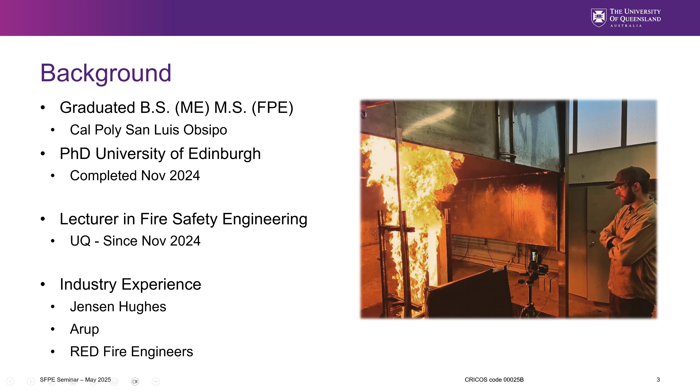So the goal of today's presentation, if we can summarize it and hit the punchline right away, is really to discuss fire growth rates in the context of a design fire analysis and to link those growth rates to fundamental physical drivers. I'm going to use the terms physical drivers and fundamental phenomena throughout this presentation. An example of what I mean is understanding how we contextualize things like growth rates in the context of flame spread. Flame spread is a very specific fire phenomenon, and we can use that to provide some context behind things like fire growth rates and heat release rates. So that's the objective of today's presentation.

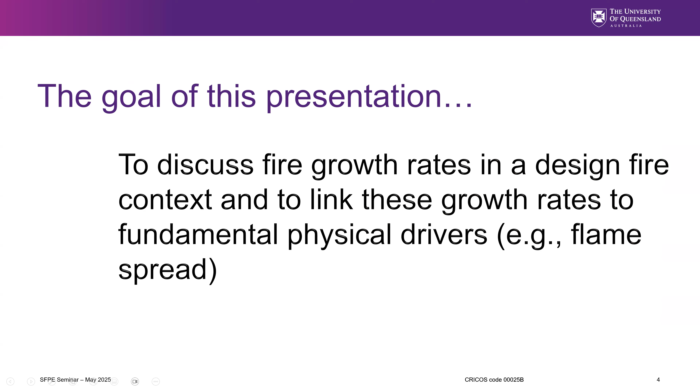To briefly rattle through a presentation outline, we're going to start with a little bit of background. We're going to look at what fire growth is, and how we characterize things like fire size. It's typically a discussion of things like using heat release rate curves, what an alpha T squared growth curve is, those kinds of things that I think a lot of engineers will be familiar with.

I'll briefly discuss some fundamentals on flame spread. This is not a dedicated flame spread lecture. I would love to give a two hour dedicated lecture to these kinds of things, but we'll keep this within the context of fire growth.

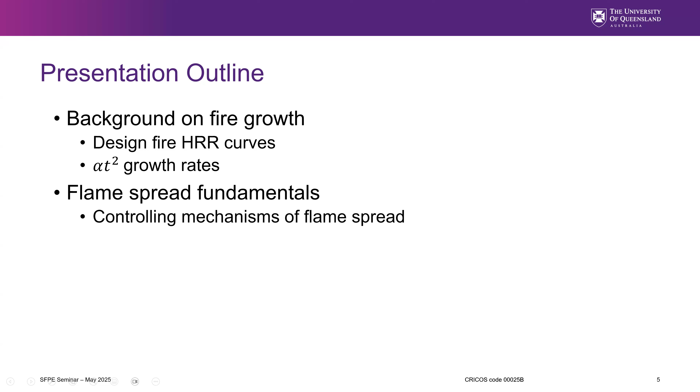And then lastly, we'll look at things like heat release rates for complex fuel packages. How do we actually characterize things like fire growth? And then we'll touch very briefly on how growth rates and the framework that we have for fire growth change as we look at emerging hazards and new things that we're seeing in fire safety engineering.

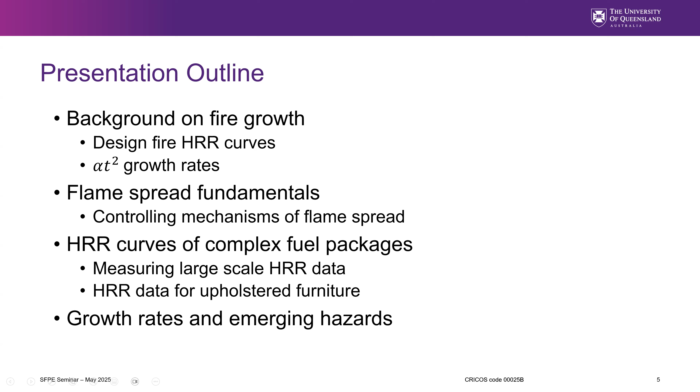So just to kick things off, in a range of fire scenarios, the hazard of a given fire is largely linked to this process of fire growth. It's this idea of transience, that a fire will grow, that makes fire so particularly hazardous, particularly in the context of considering occupant safety. All of these things require a transient analysis of fire growth.

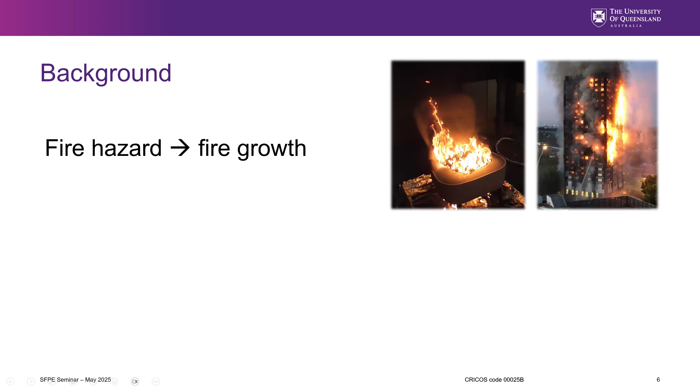So this concept applies to fuels that you might see in a typical building fire, things like upholstered chairs, so our typical fuel loads. This also relates to exterior fires on cladding systems on the exterior envelope of a building. But this concept also applies when looking at fire growth in a bushland environment, and things like the wildland urban interface. The hazard of a fire will evolve as that fire grows.

Now, this rate of growth is often linked to the concept of flame spread. Flame spread is not the only thing that drives fire growth, but if you think of the idea that fire will grow to consume fuel nearby, then the mechanism by which a fire spreads to other fuel is an intrinsic part of fire growth. So that's one that we're going to focus on in particular detail today.

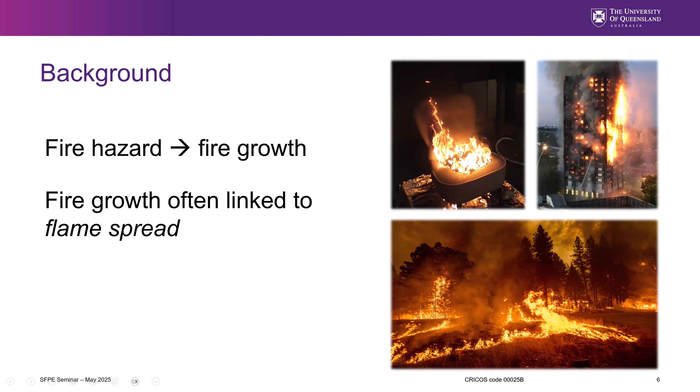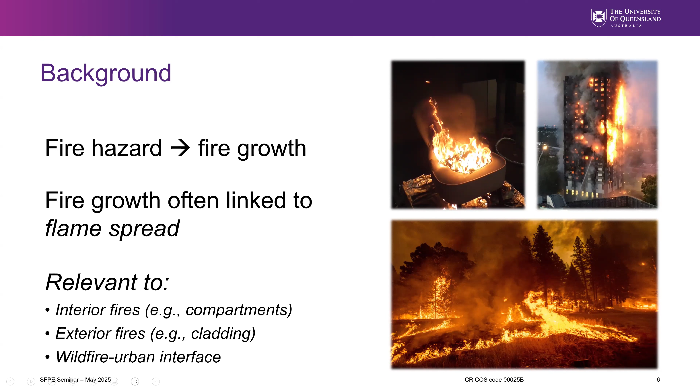Now, this idea of flame spread being linked to fire growth, and fire growth being linked to fire hazard, can be relevant to all sorts of conditions. This could be relevant for compartment fires, for exterior building fires, and for things like bushland fires. However, we're primarily going to focus our presentation today on compartment fires, the typical kind of fuel loads that we'll be looking at as fire safety engineers. Not to say that these principles can't be applied elsewhere, though.

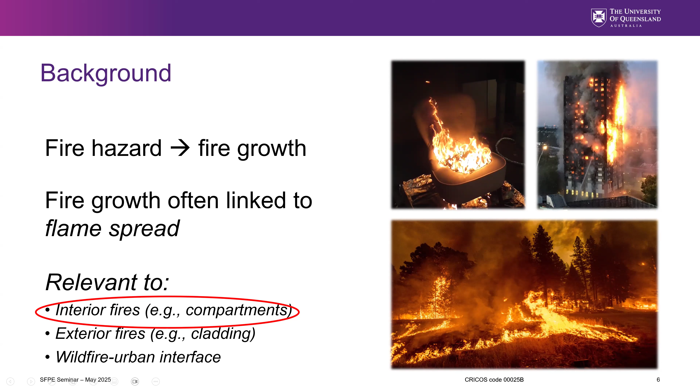Now let's take a look at the framework of our design fire analysis. When we're doing something that requires us to assume a design fire, at the heart of that process lies our assumption of a heat release rate. There are different ways we can define a design fire. You can use temperature time curves for structural calculations. You can use all sorts of other assumptions. But really, when we're trying to characterize fire behavior, the heat release rate is our best metric for fire size. So that will become an intrinsic implication in so many bits of analysis that we might do.

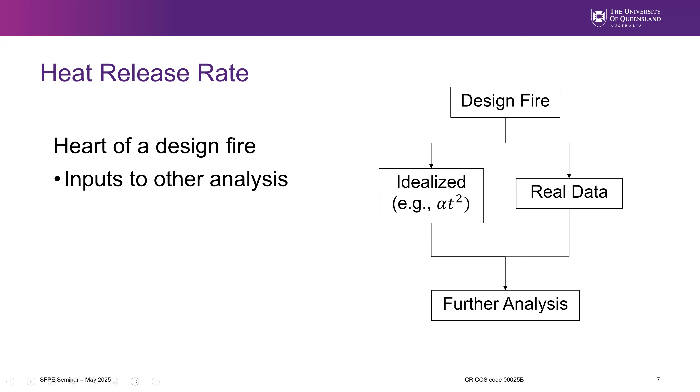And you see that by looking at all the kinds of analysis we might do in fire dynamics. But in order to choose a design fire heat release rate, you have two coarse choices. One, you can choose an idealized configuration, such as an alpha T squared fire. Or you can choose something from real data.

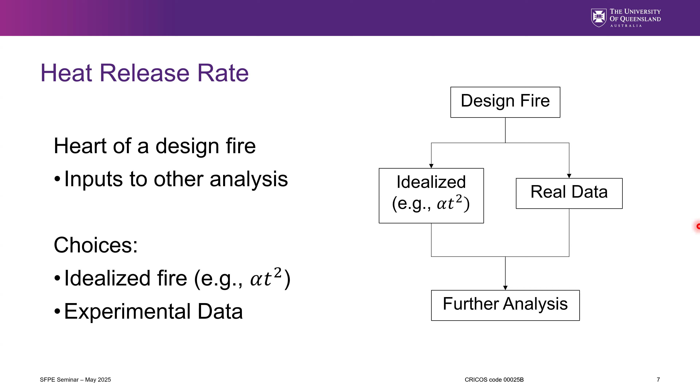You can run an experiment. You can actually conduct an experiment on a fuel package and look at the heat release rate of that particular fuel package. But regardless of the choice that you make, that heat release rate will be essential in conducting additional analysis. And again, I keep saying that heat release rate shows up in lots of different ways. If you take any calculation you might find in a textbook or the SFPE handbook, whether it's ceiling jet correlations, for things like a sprinkler calculation or just understanding the temperature distributions along a ceiling, whether you're looking at entrainment rates for something like two-zone modeling, or whether you're looking at the critical flashover threshold, all of that will link to the heat release rate.

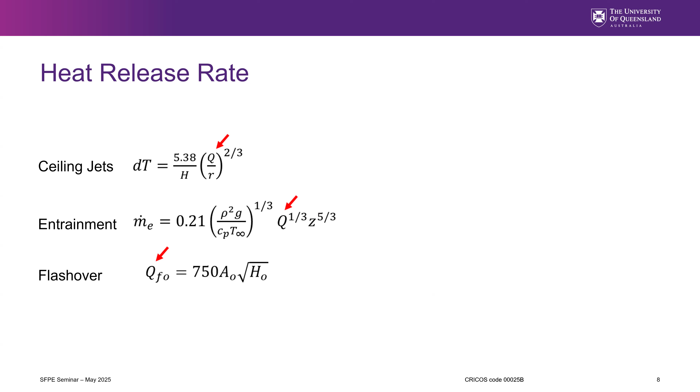And another essential sort of analysis to consider is if we're going to do anything with CFD, if we're going to be running an FDS simulation, we need to be able to prescribe a heat release rate.

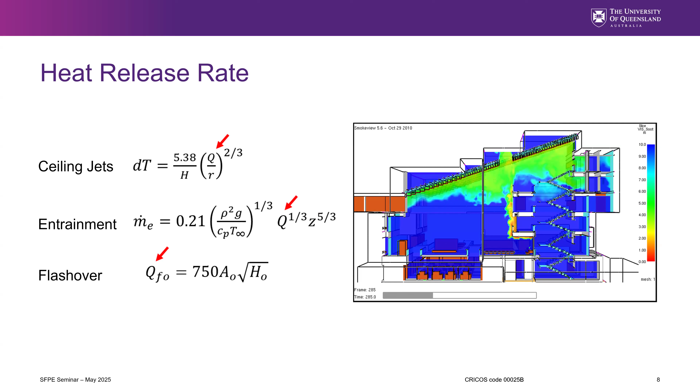So I think it's very clear, though, that this heat release rate really is at the heart of these kinds of analyses, right? So the definition of our heat release rate, and for a lot of analysis, the definition of how we define that growth rate becomes extremely significant in this analysis that we're running. So I said there's sort of two choices, right?

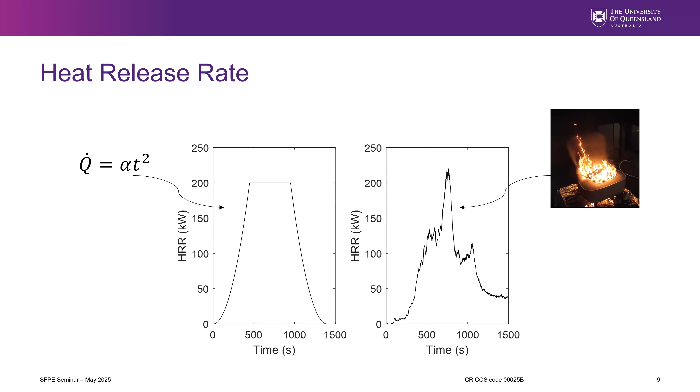This is an upholstered chair that I burned under a calorimetry hood over at the University of Edinburgh, and this is the actual heat release rate output that you'll get. So if you ignite that fuel package and you let the fire grow, you can actually measure that transient fire size, right? With all the peaks and troughs and all the transients to it. But that's a very specific case, right? That's the heat release rate that occurred for that experiment, compared to something that could be a little more generally applied, such as an alpha t squared growth rate.

But in either case, how do we define this sort of growth rate? Can we characterize this, and how do we use the information of that growth to a peak heat release rate? How can we use that information as an engineer, right? In what ways can we actually incorporate that into analysis? And that's really the heart of what we're trying to get at today.

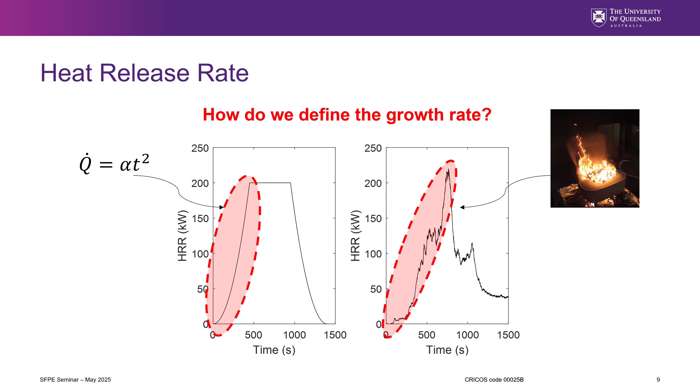So again, I've been throwing around this terminology of alpha t squared fires, and I assume that many fire engineers are familiar with that term, with what that actually means. But I want to go into a little bit of the context and the historical setup of the alpha t squared framework. So basically, the alpha t squared heat release rate curve assumes that our fire will grow with a t squared, or time squared, dependency, and then we can calibrate that using a different alpha coefficient. From things like the SFPE handbook and other resources, you'll be able to find tabulated growth rates for what we'll call a slow, medium, fast, and ultra fast fire curve.

Now, these are all coarse approximations, but really what they're approximating are categories where they took effectively how long it takes for that fire to reach about 1 megawatt. It was actually, I think, 1055 kilowatts in the original literature because it was a conversion from BTUs. But it's about a megawatt. And in this case, a slow fire would take 600 seconds, and an ultra fast fire would only take 75 seconds to hit that approximately 1 megawatt threshold. So that's the idea behind this framework. But where did this actually come from? And so

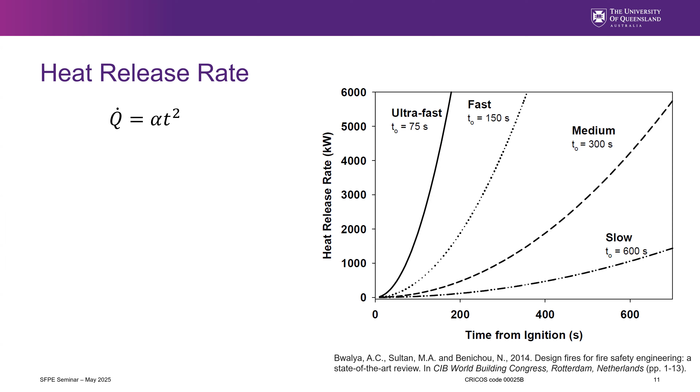there's quite a range of codes and standards internationally that you can look at to provide some basis for this alpha t squared relationship, particularly in a design context. Just picking an example, I'm going to reference NFPA 72. This one actually has quite a bit of information behind the process of developing an alpha t squared fire. And it's an interesting reference to take a look at and read through some of the commentary.

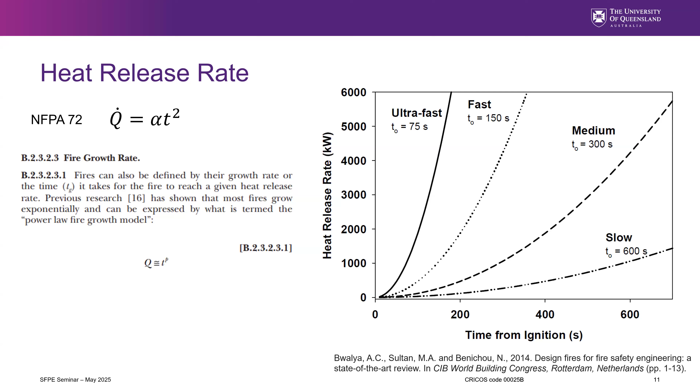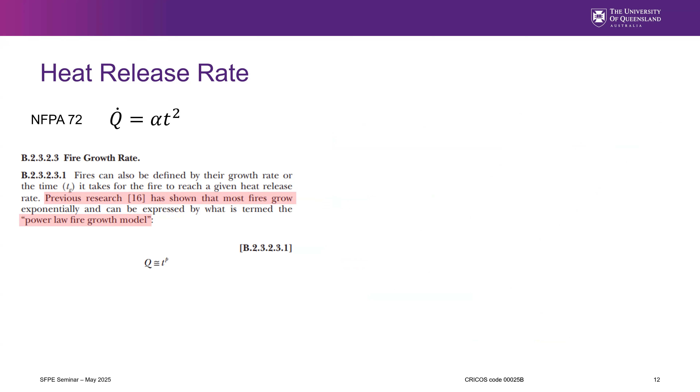But what's interesting too is if we start with this definition from NFPA 72, we'll say that if we're developing a heat release rate for fires, research has shown that most fires will grow with a power law dependency, right? It's an interesting starting point. So we're saying that fires generally grow as a power law. If you look at a fuel package in a room, it probably won't grow linearly, but it'll grow with some sort of power dependency. Now, in the context of most design standards, the simplifying assumption becomes that we can take experimental data, take a bit of a leap, and reduce that power law dependency to a t squared relationship.

The data that's provided in something like NFPA 72 shows that there's a lot of examples where, when you burn a fuel package, that heat release rate will grow with something like a t squared dependency, right? So that becomes a nice simplifying assumption. So long as we can calibrate that alpha value, we can actually develop a generic design fire growth rate. And that's sort of the philosophy behind this, right? But it all stems from this idea that there's a power law dependency for most fire scenarios.

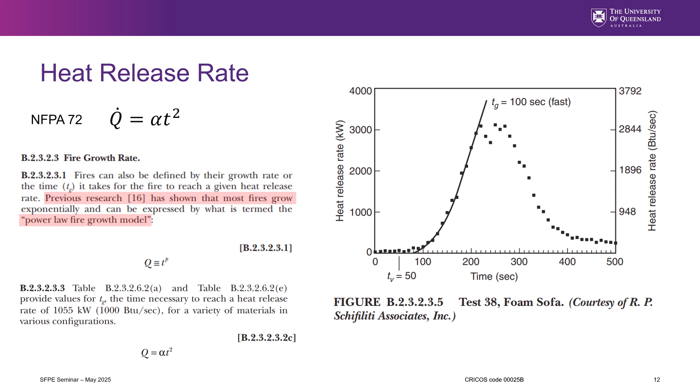And we're assuming that the fuel packages that we're interested in are going to grow with a t squared dependency, right? And that's kind of where it stops. And then also NFPA 72, for example, goes on to provide tables and tables of information on different fuels. So if you choose, let's say, wood pallets stacked 1.52 meters high, right? You can then back out what would be the alpha classification for that fuel package, right? If I'm looking at other things, let's say, I don't know, what's another one? Polyurethane mattresses, you can actually back out an alpha value for those, right?

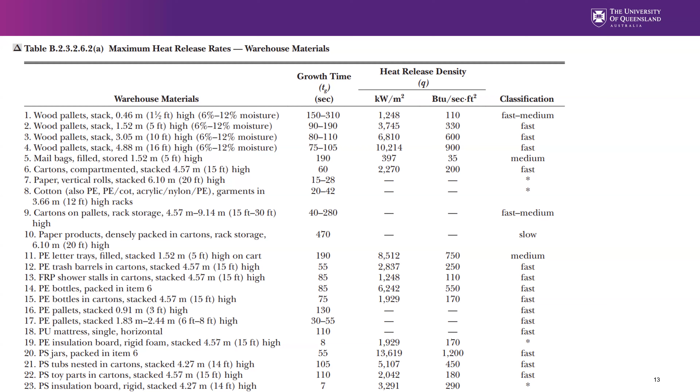And so from this information, in theory, an engineer can take our fuel load and develop an approximate growth rate, right? That's kind of the philosophy behind providing this information. And there are tables like this not just in NFPA 72, but in various resources in the fire safety literature. But it's an interesting question, though, that I'll pose, right? Is this enough information to really define our growth rates for design conditions, right?

As an engineer, for all scenarios that we might design for, is simply prescribing the fuel load enough, right? There is a lot of value in understanding the range which these fuel loads give us, but are we capturing the whole picture? Is there something else we should be thinking about? Or at least, what's the limitation of this table? At what point do we need to consider some additional information, right? Because really, the choice in our growth rate makes a huge difference in the analysis that we might run.

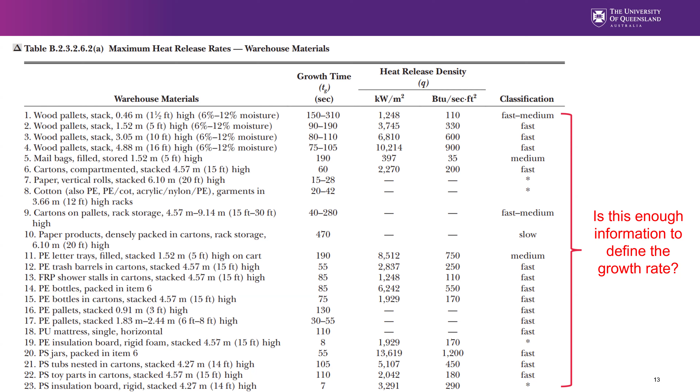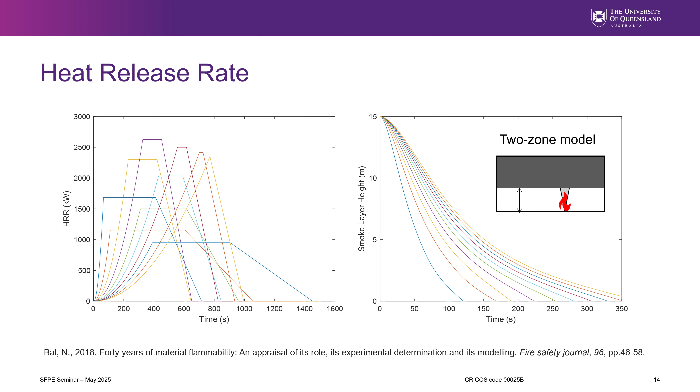So whenever we're doing analysis, particularly for life safety, whether it's looking at tenability or analysis looking at, say, alarm detection and suppression calculations, right? These growth rates are incredibly important, right? So while we have these broad categories of understanding fast versus medium fire growths, right? Changing those things slightly makes a huge difference in our analysis, right? So how do we gain more confidence in what growth rates we might choose, right? How do we actually build more confidence in being able to adapt this to the scenarios that we're looking at, right? And that's really what we want to dig into a little more detail.

So let's take one big step back, right? We've been talking about alpha T squared fires, and so far the basis that we understand is that in NFPA 72, there's a lot of data that's presented that shows that it's a decent fit to a T squared type dependency, okay? But can we provide a better physical basis, particularly for a time squared dependency, right? Because fires grow in all sorts of funny ways, right? So what's up with this T squared time dependency in particular?

Actually, if you go back, there's some really interesting, particularly post-World War II literature, where in the early days of developing design fires, there was a lot of fire testing done on horizontal surfaces, looking at a physical basis for a T squared dependency, right? There's a lot of really interesting literature out there, particularly in a flame spread context. But basically what you do, from a physical perspective, is take all of those parameters and lump them into one alpha term. So by assuming an alpha T squared fire, I'm assuming, for example, one base case that has a physical basis is a radially growing fire.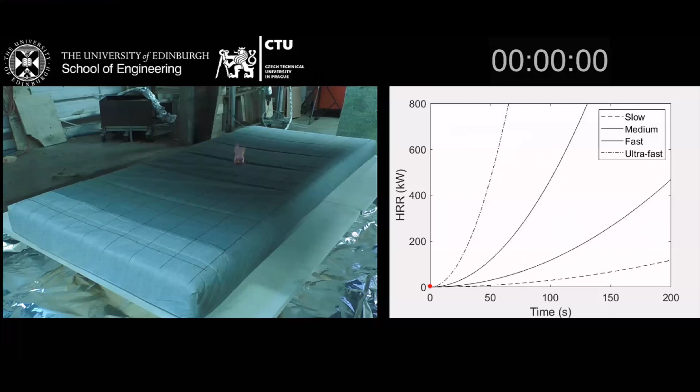What's really interesting too is if I go back and play it again, take a look at what happens to the heat release rate curve up to the point where the flames reach the edge of the mattress. So the sides, there's one dimension that's shorter. It's following the t-squared dependency. Then the second it hits the edge of the mattress, it starts to deviate from that t-squared dependency because you no longer have a radially growing fire, right?

So the physical basis for a t-squared dependency for this fuel package is a very good assumption. It's kind of an ideal scenario for something like a fast alpha t squared fire. It fits perfectly, right? So that is a great example of a fire scenario in which we can use something like our alpha t squared growth rates to reliably predict the growth rate of a fire.

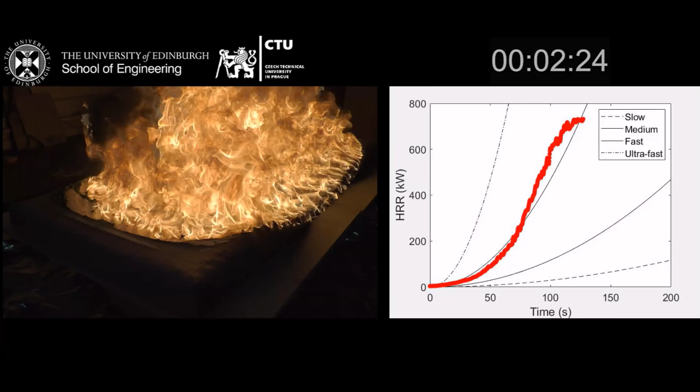But in order to understand how this starts changing with complexity, it's worth taking a step into the world of flame spread, right? So we know that the rate of flame spread is affecting our fire growth rate for a fuel package like that, right? So what is flame spread, right? Now, the concept of flame spread was the topic of my PhD, so this is something that is near and dear to my heart, and I could ramble on about it for hours. The students in the room here have probably heard me ramble on about it for hours. But for the sake of this conversation, I'm going to keep it fairly limited to understanding how we link this to fire growth, right?

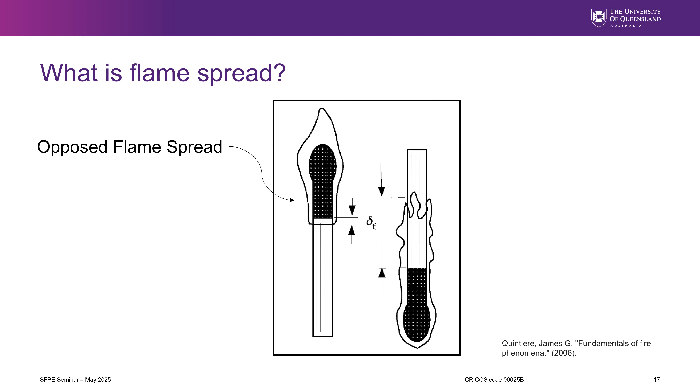So we're going to largely split flame spread into two categories. We're going to look at things as either an opposed flow flame spread problem, right? Imagine striking a match and watching it slowly creep down the matchstick. The flame is moving in the opposite direction of the airflow being entrained upward due to buoyancy. And concurrent flame spread, meaning that the flame is moving in the direction of induced buoyancy, like you strike a match and hold it upside down, right? That kind of effect.

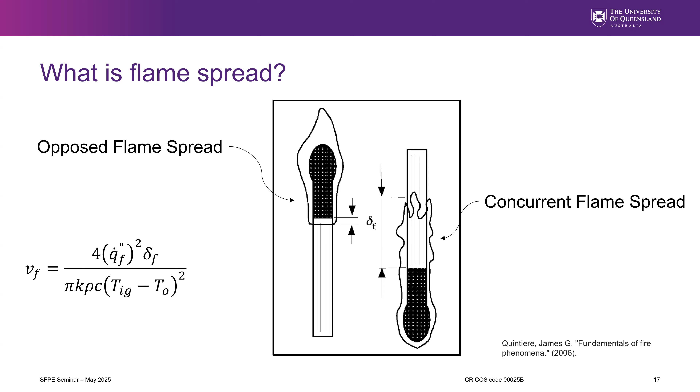If I add more energy from the flame, my flame spread rate goes up. If it takes more energy to actually raise my fuel to the pyrolysis temperature, my flame spread rate goes down, right? And there's quite a bit of complexity beyond that, but for the sake of most engineering problems, we can reduce the problem to that simple equation, right? So on the simplest level, let's look at it as just an energy balance.

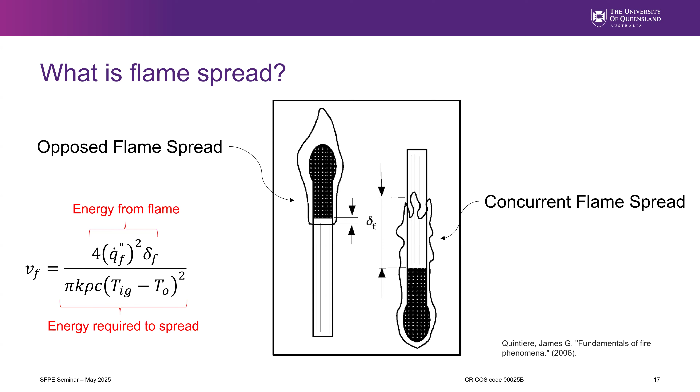One thing to note, though, is if we're looking at things like upward or downward flame spread, opposed or concurrent flame spread, there is a little more complexity there, right? And I would recommend for anyone who's interested in reading further, there's a great reference here by Fernandez-Pello and Hirano that is a great review of what we'll call the controlling mechanisms. Like, what are the processes that actually control the flame spread process, right? And if you start looking into more complex things, we have to incorporate things like the kinetic rate, the reaction rate of a flame will influence flame spread, right? So in putting all of those complexities aside, we're reducing the problem, for the sake of an engineering analysis, to the amount of heat transfer we can provide to the fuel, right?

But what's interesting to note in comparing opposed flow and concurrent flame spread is for the opposed flow case, right? Let's imagine that matchstick example. If you're talking about how much energy the flame can transfer to the fuel, there's a very small area over which that can happen, right at that leading edge of that match flame. There's a very small area over which that heat transfer is acting, right? When you're looking at concurrent flame spread, there's a much longer distance over which that flame can heat the solid, right? Resulting in very different rates of flame spread.

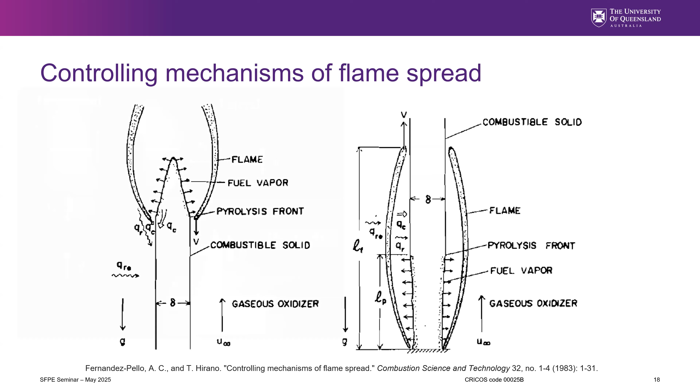The point being that you'll often see upward flame spread, concurrent flame spread, will be much faster than opposed flow flame spread, right? For all things being equal, just try lighting a match at home and you can demonstrate that yourself, right? But the point of that being that even within the world of opposed flow flame spread, if I start changing my geometries, rates of flame spread will change, right? So these are some examples from my PhD where I took PMMA, a very common polymer in fire safety science, and we did flame spread experiments in different orientations.

So if you look at downward flame spread in a wall configuration, lateral flame spread, again in a wall configuration, and horizontal flame spread, which is more akin to what we saw with the mattress, for example, right? Each of these configurations are opposed flow flame spread configurations, right? Your flame is moving in the opposite direction of entrained air at the flame front, but the actual geometry of the flame is changing in each one of these cases, right? And as you can see from the results there, the flame spread rate changes as a function of this geometry.

And so because of that, it's important to know that if things like our flame spread rate play a role in our fire growth, then let's say I know the flame spread rate in one configuration, or I know my alpha value in one configuration. When I change my configuration, everything else changes because the heat transfer ahead of the flame front is going to alter your flame spread rate, right? So that's an important thing to keep in mind when we're looking at applying things like flame spread to practical engineering scenarios.

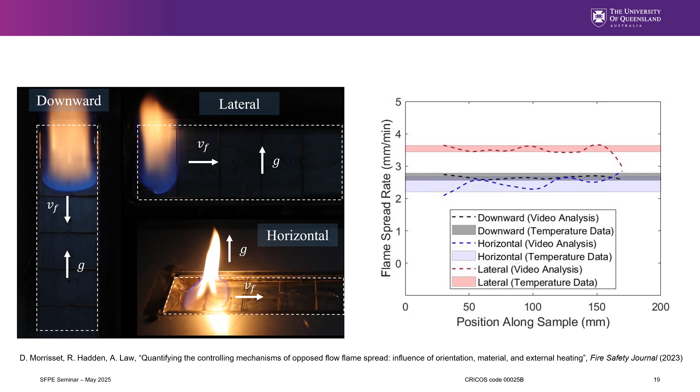So let's go back to that idea of the alpha t squared fire. Let's go back to that mattress example, right? So let's assume we have a horizontally spreading fire, right? And the flame spread rate is more or less constant. That's something that we saw for opposed flow flame spread. You can actually get constant, steady flame spread behavior. That makes sense. So this idea of a t squared dependency starts to check out, right? We walked through that derivation.

That seems good, right? But what happens if I put this mattress in a compartment? Right, so what if I put this in an actual room and we allow a smoke layer to develop? So if you put it in a room and now you allow a smoke layer to develop, that smoke layer is going to add an additional heat flux to your fuel, right?

If we put this inside a compartment, it might not be the smoke layer, it could be a heated wall or an additional burning item, but there could be some sort of external exchange with your fuel. Now we assume that this alpha T squared relationship holds, but we know that embedded in that alpha is your flame spread rate term. And we also know from that very simple equation that we showed for flame spread that your flame spread rate is going to be linked to the external heat flux conditions on your surface.

So if you have interaction with your fuels, with whatever else is going on in that compartment, ultimately we're saying alpha, our growth rate, is intrinsically going to be related to the heat flux conditions acting at the fuel. Meaning that alpha might not be constant in time, particularly when we're looking at fuels in an actual compartment, right?

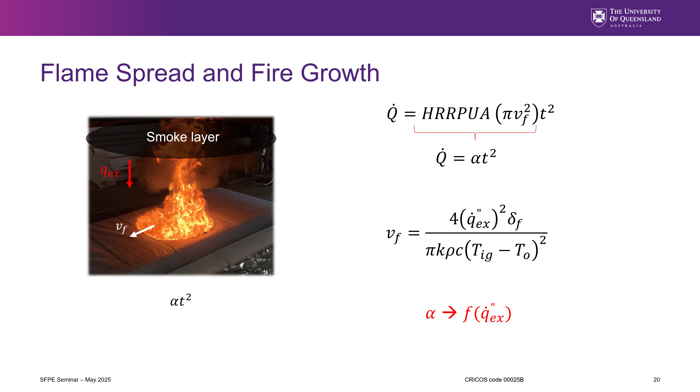So just at the simplest level, it's important to acknowledge that even if we have a case in which the alpha T squared model is valid and it works really well and we can get an idea of that growth rate, it is a big assumption to maintain that that growth rate will stay at that growth rate when it starts interacting with the compartment around it, right? Just something to consider for developing a design fire.

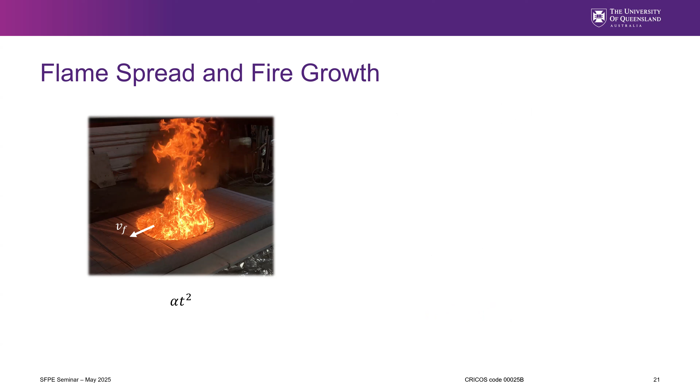But now let's move on from something like a compartment geometry, and let's just simply change the orientation and the mechanism of flame spread. So if we go from something like this horizontally growing fire to an upward flame spread problem, let's say you have a wall of, let's say, PMMA in this example, what does that flame spread process look like, right?

Now, this is an excellent paper from 1975 by Orloff and De Ris. So I would absolutely recommend people go and read that work if anyone is interested in looking at the problem of upward flame spread. But what this work was able to do was to develop a sort of fundamental relationship where how do you actually look at how does the flame spread rate change as a function of time for a very large piece of PMMA. This was a very large wall for upward flame spread.

And they were able to demonstrate that actually you can pretty reliably approximate the rate of flame spread not using something like a t-squared dependency, but using an exponential dependency, right? And so there's natural physical basis that when you start looking at the problem like upward flame spread, you can move to an exponential time dependency, right? And that's a better approximation in terms of the physical drivers, actually affecting that process of fire growth, right?

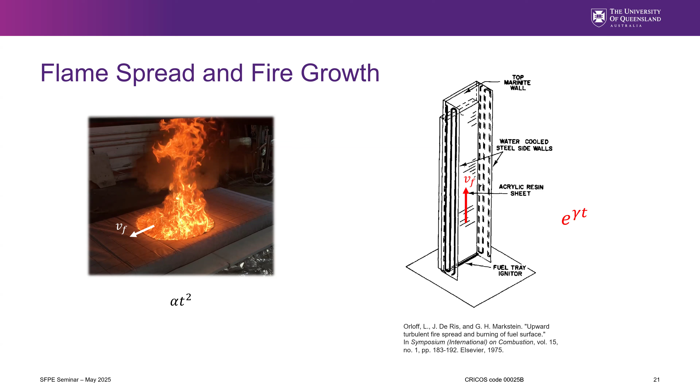So what can we take from that information? If you take something like a fire in a room, you start as a sort of radially growing fire. Let's say that fuel package starts in a room. It starts to consume additional fuel around it. That means in that stage, there's a very good physical basis for an alpha T squared fire.

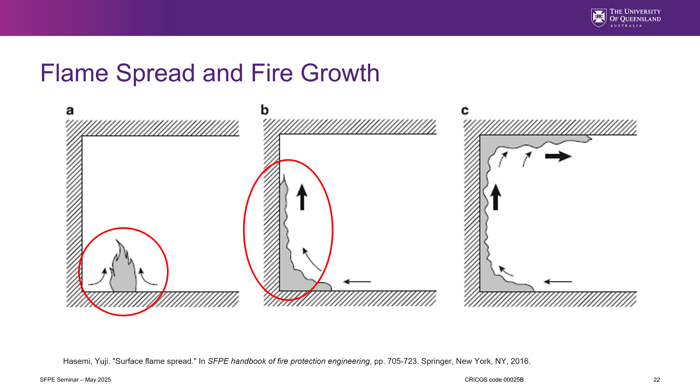But let's say that fire eventually attaches to a wall and starts experiencing upward flame spread, right? That's where the assumption of a t-squared dependency starts to become a bit difficult, right? Because actually, your time dependency is much more fundamentally linked to something like an exponential growth rate because of the upward flame spread phenomenon, right? So that just sort of gives an idea of over the course of a compartment fire, the drivers, the things that will actually affect that growth rate might change over the course of the fire, right? So we need to sort of account for that as fire safety engineers.

Now, all of that is the theoretical basis. All of that is about equations and effectively understanding where flame spread plays a role in this, right? But now let's talk about if we actually want to look at the growth rate of a real fuel package, how do we actually measure that, right?

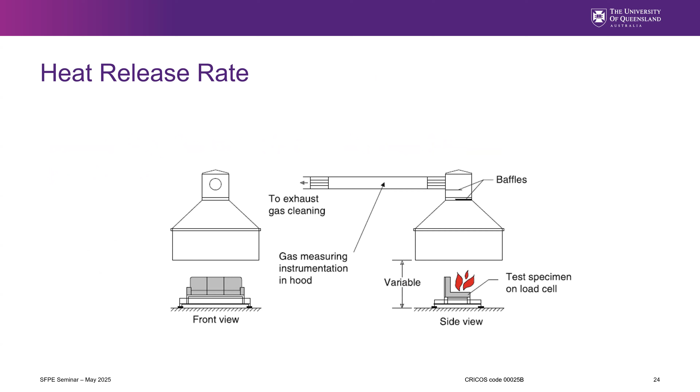And so many people are going to be familiar with this idea, but if you want to measure my transient heat release rate of a couch, you can take that couch, put it beneath a furniture calorimeter, light it up, and measure the heat release rate. By capturing all the combustion gases, you can back out as a function of time what is the size of my fire, right? Now, the beauty of this is we can take any fuel package we want and characterize the transient heat release rate behavior of that fuel package, right?

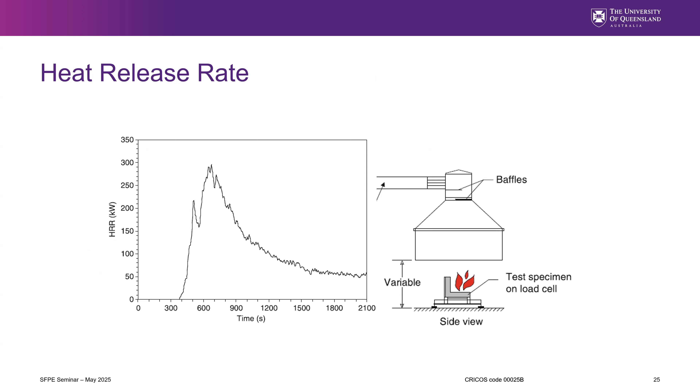So for any engineers who are interested in finding this kind of data, one database that I highly recommend is the NIST calorimetry database. The researchers at NIST have done an excellent job updating this database. There's lots of information on there, ranging from heat release rate to video of these experiments, very good uncertainty analysis and so on. It's an excellent database. Another resource to consider, if you want to look at heat release rate curves, is Babrauskas' chapter of the SFPE handbook. Lots of very good information in there as well.

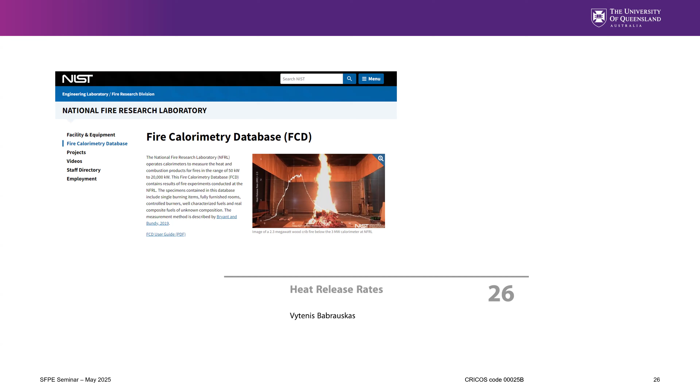And that gives you an idea. It's very easy to go out there and find information on heat release rate data, right? And I think there's a lot of value to that as a fire engineer. But when you're pulling out information, I do think it's really interesting to take a step back and consider a few things when we're looking at heat release rate data.

So it begs the question, right? If I'm trying to characterize the characteristic heat release rate of potato chips, can I assume that it's going to be a 6 megawatt fire within 100 seconds in all scenarios? Right? That's a pretty dramatic fire. It's a really extreme growth rate in particular. That'll be a very onerous design fire for a lot of scenarios.

So the question becomes instead, what was the makeup of this display, right? How was the display built? What were the materials that actually built the unit of that display? How are these fuel packages arranged within that display? Where was it ignited? Was it ignited at the bottom, so you got upward flame spread? Or was it ignited somewhere at the top or the side where you got something more like an opposed flow flame spread, right? All these things are going to completely change your design fire, and they will fundamentally change fire growth.

So it's important to look at these things and understand that this is the integrated effect of all of the physical phenomena that drive a fire, not just these potato chips, right? And I think that's a really important point to make. It's still extremely useful. If we had more information on this kiosk, you can actually understand, okay, this is maybe a worst case fire size we might expect from something like that. That's extremely valuable. But then again, taking things like the growth rate with the context that it's going to be extremely situationally dependent.

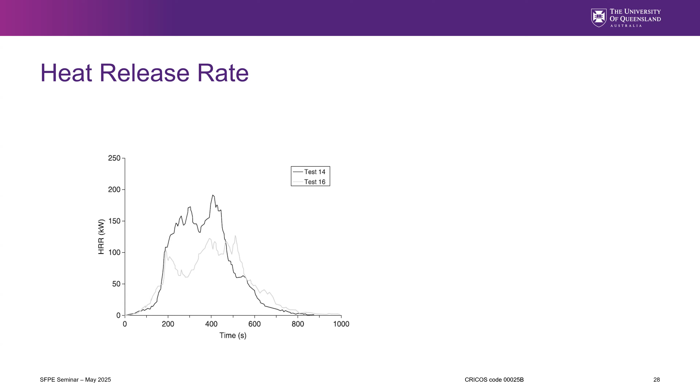But simply by running the same experiment again, now I'm finding the peak heat release rate somewhere around 200. Right? So understanding that when we're looking at complex fuel packages, there's a lot going on. We need to understand why was that different, right? What were the physical mechanisms that actually led to that heat release rate being higher? And so this became a bit of an interesting rabbit hole.

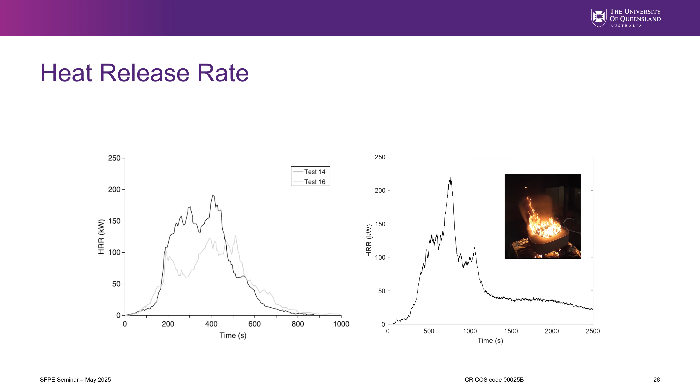So I was thinking, if I take a single upholstered chair, right, and I run an experiment on it, that's the heat release rate curve I get. So I took a chair, I ignited it with a Bunsen burner. That's the heat release rate curve I get. Is that characteristic of that fuel package? If I run the same experiment again and again and again and again, 10, 15, 20 times, what is that heat release rate curve going to look like? Right. And so that's what I did.

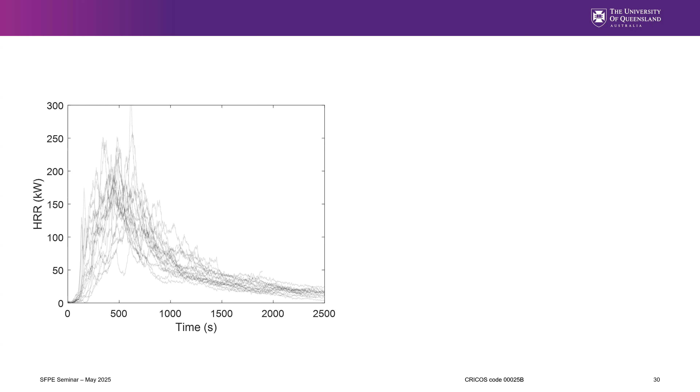And so this becomes something that, I say this not to labor a point, but we see this in the literature all the time. Experiments that are conducted on complex fuel packages like cars, electric vehicles, things like that, where we take those curves and we take an average in time. But that average in time no longer physically represents any individual experiment. So we're no longer actually characterizing the growth rate or the peak heat release rate of those fuel packages. So instead, it's really worth taking these curves and asking, can we identify the variability using a different metric than just time? So if we take each one of these experiments and we identify a bunch of key events throughout the experiment, okay?

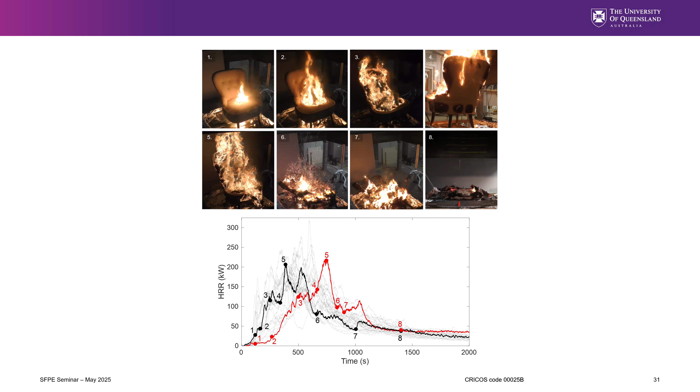So if you continue down the line, you can start to see that if we link up all these points and, if you can, in your eye, imagine dragging point 3 and point 4 and point 5 to then intersect with one another. All of a sudden, you have a curve that actually represents a similar fire behavior, right? You actually start to capture a very general trend. And we were able to demonstrate that, where if you plot this instead of as a function of time, but as a function of these events that occur, not only do you get a much more consistent average behavior of this fire behavior, and you can look at this distribution of when all these times occur,

but you can also start to look at these regimes where in the beginning, the fire growth rate, your heat release rate, was controlled by radial fire spread over that seat cushion, opposed flow flame spread, alpha T squared type behavior, right? Then the second the backrest ignited, that new regime was dominated by upward flame spread, which means that your mechanism of fire growth is now changing. And then so on, you go through the burning process. But that's what we were able to articulate with that project: by looking at these experiments very carefully, we were able to identify the actual physical mechanism, something like opposed flow flame spread or upward flame spread, and how that actually manifests itself in the heat release rate data, right?

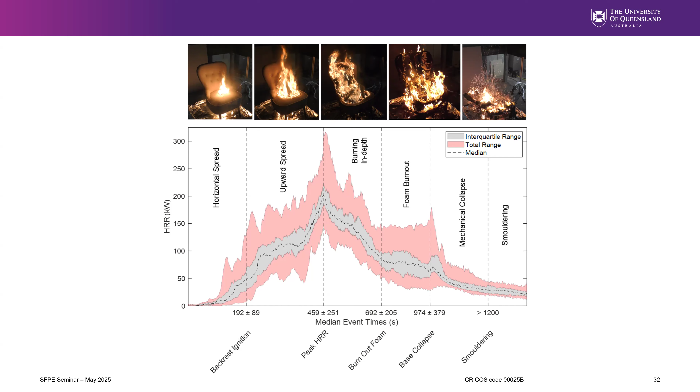So the last point on the upholstered furniture experiments is, let's say I take one curve, just as an example, right? And I want to approximate that growth rate from the beginning up to the peak heat release rate. So there's nothing stopping me from taking this and putting an alpha T squared curve onto it, right? And actually, one could argue that that's not a bad fit, right? It follows some sort of T squared-ish dependency. But again, that's not capturing the whole problem, right? Because there's more going on there than just that. It's not like the fire was just radially growing. You can see that there are clearly points that over or under predict my growth rate, right?

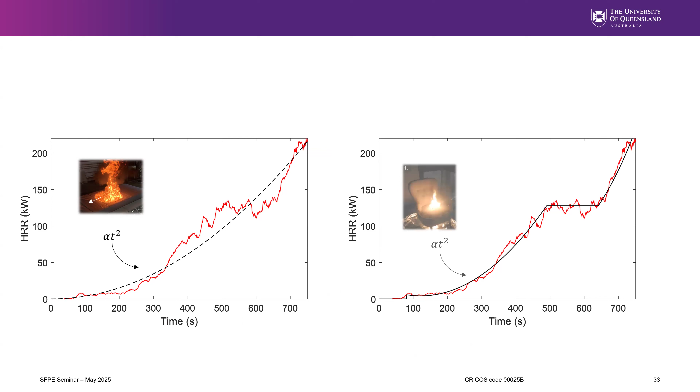So instead, let's take the same data and separate some different flame spread regimes, so to speak, right? Let's say I only fit the alpha T squared to the period in which we observe radial fire growth, right? So this first little bit is when, based upon my visual observations, I was able to say that's radial fire growth. And now that fits very nicely to an alpha T squared, right? Because the mechanisms of fire growth match what we described for the mattresses. So we have a nice physical basis by which that could be an alpha T squared fire. Then there's a bit of a delay between the fire growth radially and then eventually igniting the backrest. So that causes a bit of a plateau. But then once the backrest ignites, all of a sudden we transition to a really rapid period of fire growth.

That particular period of fire growth doesn't follow an alpha T squared behavior. You can just see by your eyes, right? Instead, that follows the exponential behavior we might expect for upward flame spread, as defined by that study by Orloff and de Ris. So all of a sudden, just by making a few observations, we can then start to create a generalized curve of fire growth that is based upon the mechanisms actually driving fire growth, right?

And now, realistically, for engineering scenarios, this might not be possible for all of our fuel packages, right? In many scenarios, we'll be limited to making an assumption like an alpha T squared fire. But I think it's really important to note that by doing so, there is a huge assumption. You're assuming that the only process controlling that rate of fire growth is something like radial fire spread.

Or instead, if we look at an example that is a bit complex, we can actually start to identify different periods of fire growth and link them to key physical mechanisms. A simpler example is maybe just looking at the alpha T squared model, but acknowledging that as you start getting something like a smoke layer, those external factors will change your alpha value, right? So it's not as simple as just choosing one alpha value and carrying on, right?

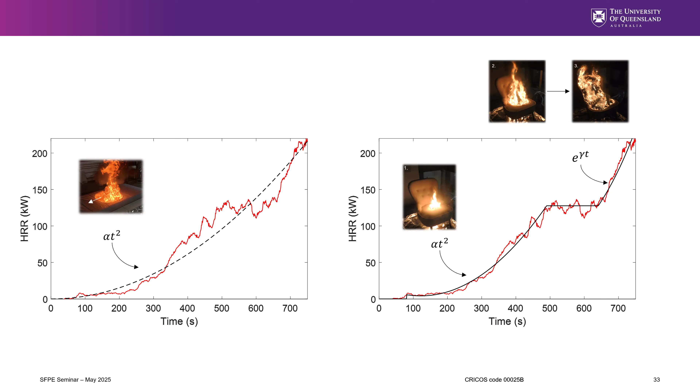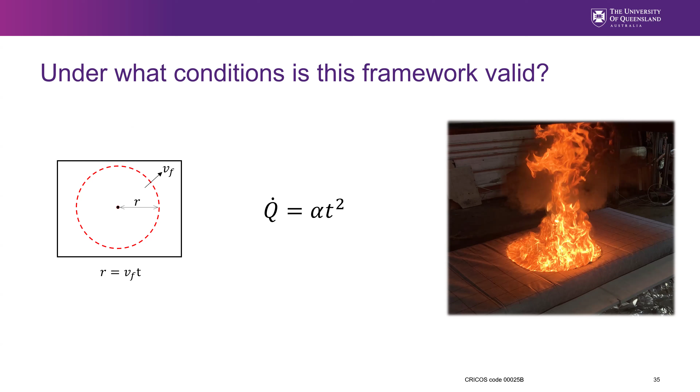Now, the last bit, I'll just take a few more minutes because I want to make sure I reserve some time for questions. But we've been talking a lot about growth rates and flame spread in the context of what we'll call typical fuels, right? Couches, chairs, mattresses, things like that. But that's not the only thing that we deal with in the built environment, right? So under what conditions is this idea of an alpha T squared framework valid? Where does this start to break down, even beyond the examples that we talked about today, right?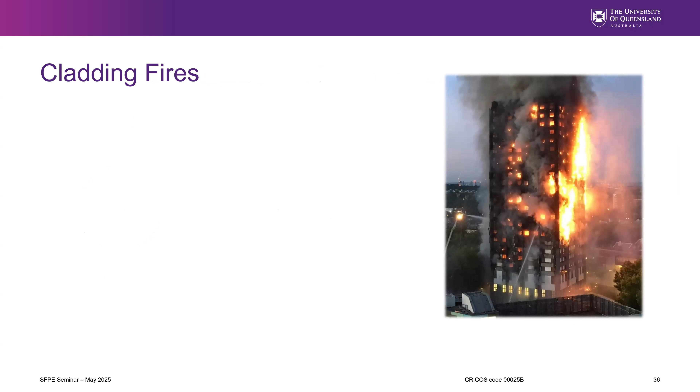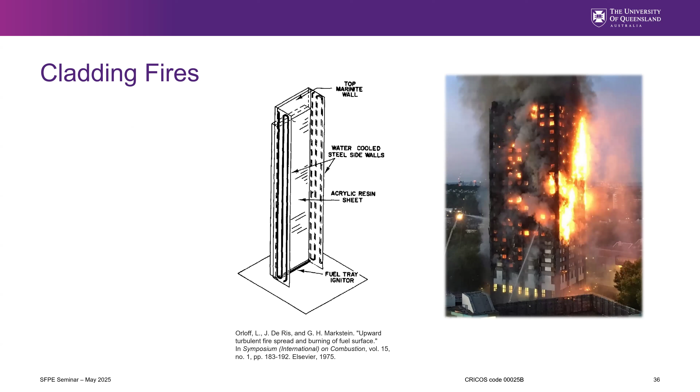One example to think about is growth rates of cladding fires, right? And again, this probably deserves quite a bit more time than what I have here, but effectively, if we're looking at the results of a cladding fire, the complexity of the interaction of those systems is not as simple as even upward flame spread on a wall of PMMA. That's complex enough. But when we start trying to understand the growth rates of something like a ventilated rain screen system, with various products and materials all interacting with one another, think about that smoke layer heating your alpha T squared mattress fire, and you take that complexity to a completely different order of magnitude, right? So there's a lot of simplifying assumptions that have to be made to even start approximating something like this. There's a lot of embedded complexity, right?

I think another example too is looking at things like lithium ion battery fires, right? So arguably even more complex than trying to figure out what happens with a cladding fire. We've probably all seen videos of things like electric scooters and everything that's been going on around the world. But you can take a battery fire, and within a few seconds, you can go from a cloud of gas to a huge jetting flame, right? Which is fundamentally different than a mattress fire. The fire dynamics of this problem is very complex.

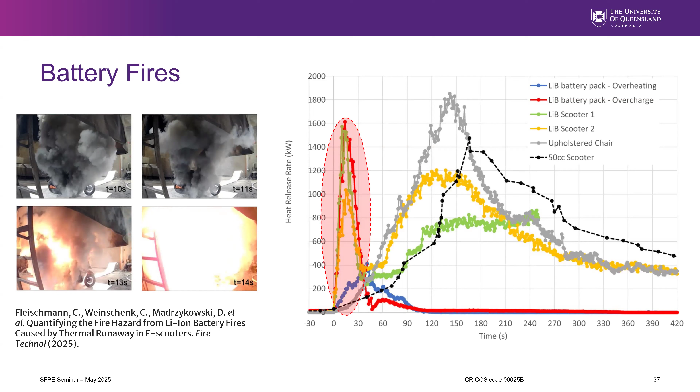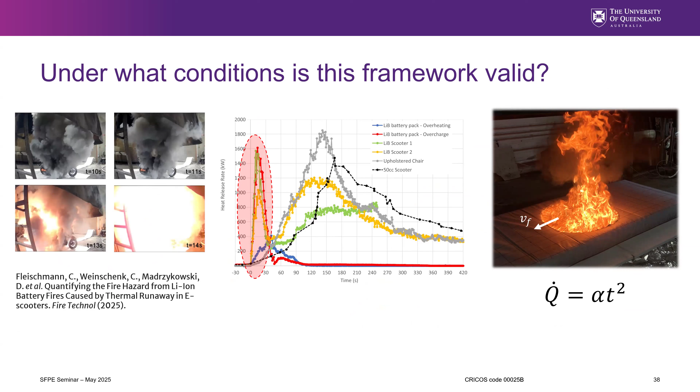And when you're looking at heat release rate curves, the actual output of your growth rate, these growth rates are ridiculously fast, right? The rates that we're talking about now don't even fit within the alpha T squared framework. These are ultra, ultra, ultra fast, and they don't follow that fundamental T squared dependency. So if we're trying to understand battery fires within an alpha T squared context, we need to acknowledge the fact that that framework breaks down when we look at something as complex as this. Understanding that growth rate requires a completely different framework. And understanding the consequences of fire spread from one battery pack to another fuel package is, again, a very complex process that isn't captured with the model that we currently have for alpha T squared fires, right? There is more complexity there that needs to be accounted for, right?

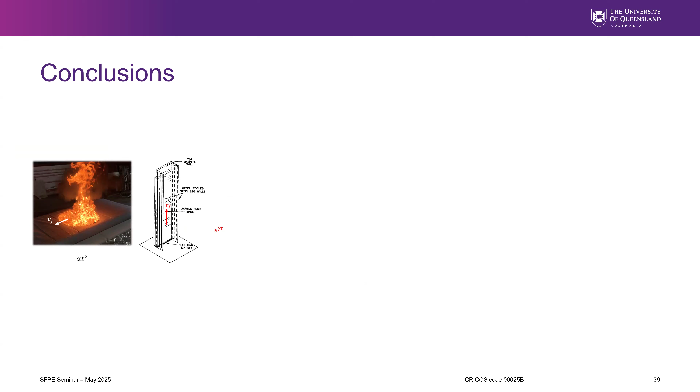Right, so just to wrap things up. There was a lot of content covered, but I think the crux of all this is whether we're looking at horizontal fire spread, upward flame spread over a wall, or the burning of an upholstered chair. The process of fire growth is the consequence of all the physical phenomena, including flame spread, that might manifest themselves in that change of fire size.

The resulting fire curve is effectively the integrated effect of all of these competing fire phenomena that result in that fire growth process. So in order to reliably model the rate of fire growth for any given scenario, you really have to wrestle with some of these fundamental ideas. You need to resolve what the physical drivers are that are relevant in your scenario, and then pick a mathematical model to approximate that fire growth process.

We as fire engineers can't take the time to burn everything and characterize everything under the sun, because even if I take a fuel package and burn it under a calorimetry hood, that might not be the exact fire curve I get when I put it in a compartment. But at the same time, we need to understand that the models we use to approximate fire growth are intimately linked to the assumptions we make about the fundamental physics driving the problems.

As part of this, we did a little demonstration on something as simple as the upholstered chairs we were looking at. If you identify the regions in which different mechanisms of fire growth affect that process, we can better fit that data to mathematical models that actually match the physics. And in an engineering context, we might need something more complex, or something more simple, but that's the core idea: understanding the drivers that affect this process of fire growth.

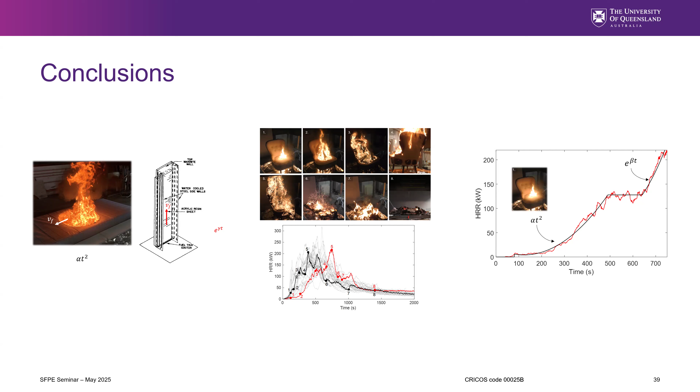Before we wrap up, I just wanted to quickly do some acknowledgements. I want to thank everyone for burning all those upholstered chairs. There were a ton of people involved in that project, so thank you to Ian, Johnny, Angus, and Rory from the University of Edinburgh.

There was an ongoing project where we've been burning mattresses, and you saw one of those cases where we looked at the alpha t squared fit of that mattress fire. So I want to thank Vladimir Moser and Milan from CVUT in Prague. And thank you to the SFPE Foundation, who during my PhD provided financial support for burning all those chairs. I really appreciate the foundation and all their efforts. And with that, I will take any questions. Thank you.

We'll speak through your microphone. Thank you very much, David. Great presentation, I thoroughly enjoyed it. I think it has some really interesting outcomes and thoughts for technical professionals within the built environment trying to design practical solutions. Now I'll open the floor up to any questions. I know there's probably one or two questions early on in the chat, if you wanted to have a look at those. In the meantime, if anyone has any questions, feel free to turn your mic on and just ask away. Thank you.

If you see the chat, can you read them to me? Because I can't find it. There was a chat early on from Tash: if one has any test reports on combustible elements, will the calculation be considered an idealized approach or an experimental approach? Yes, test reports of a combustible element. Will the calculations be considered an idealized approach or not?